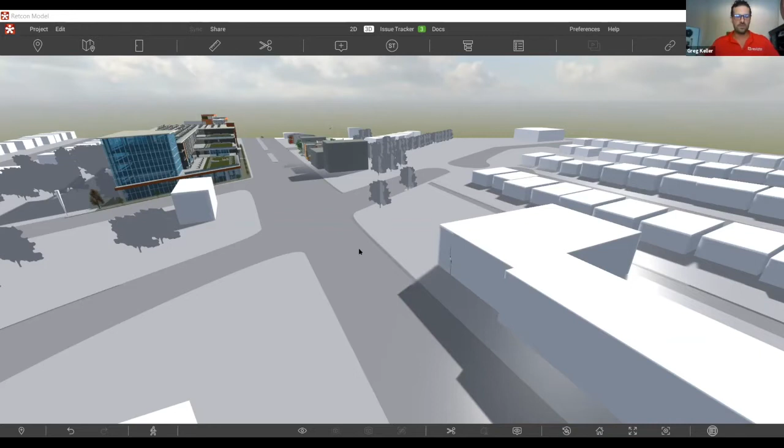So I'm just going to show you guys a quick way to be able to navigate through the model. Keep in mind, this is a massive model where we've brought in all kinds of file types, whether it be Revit models, Civil 3D models, SketchUp models, point cloud data.

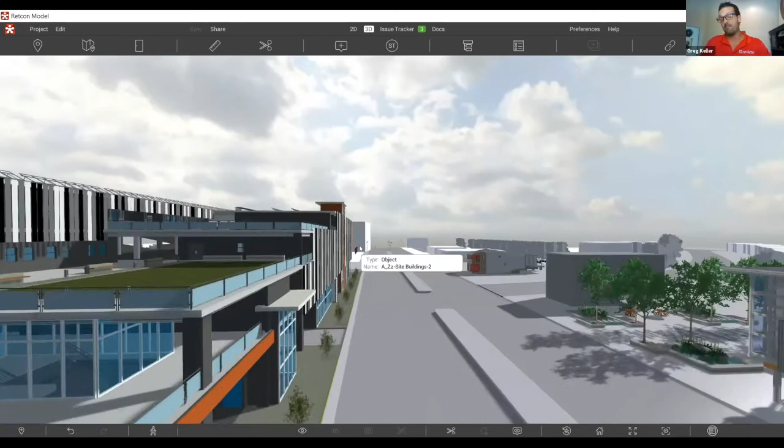So you can see that I'm able to, and it may not come as clear to you guys being over the Zoom meeting, but again, this is a massive model that I can really fly around with ease.

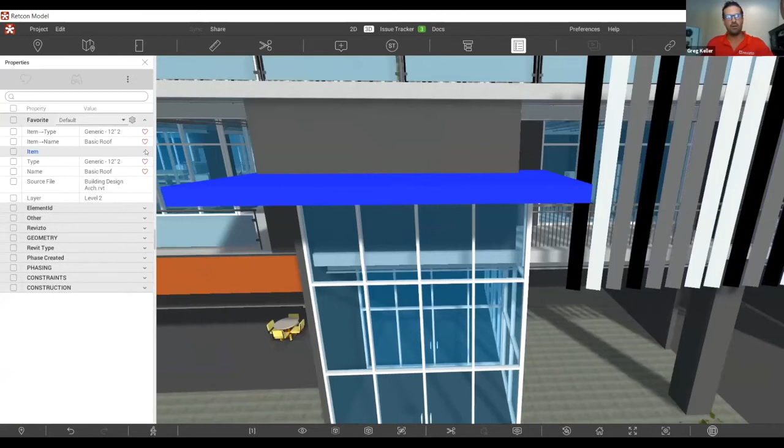And everything in this model, the intelligent data comes through with that. So every single item or object that I double click on, I can get access to all of that intelligent metadata. So again, it's very quick and lightweight to be able to jump around this model.

However, we want to emphasize that you don't want to feel intimidated that you've got this massive model and how do I get around and where do I go. So some of the things that we've got in place here are tools that allow you to jump around that model without having to physically go through that entire model, especially if you're talking about a campus like this or a 50-story high-rise, that can take a while.

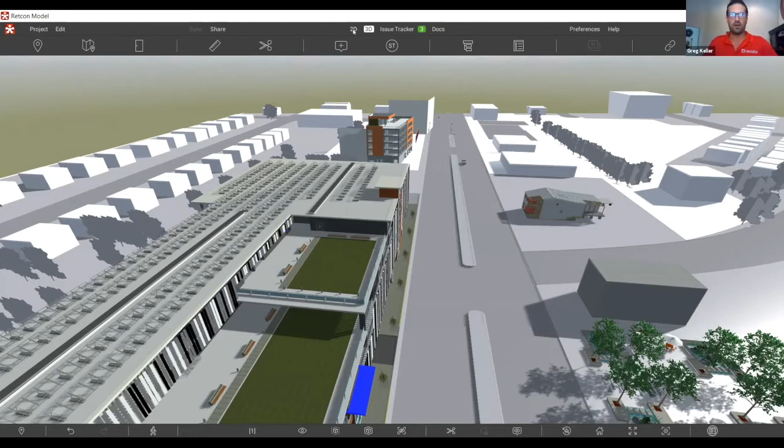So one of the things that I'd like to jump right into is leveraging the 2D sheets that you guys are probably all accustomed to, and using that as a way to get comfortable and transition into being able to better view that 3D model. So here I am in our 2D section of Revizto.

This is where all of your drawings and other associated 2D documents come from and are housed. So if I open up this sheet here, this is our second floor space plan, which I'm sure for all of you is probably what you're used to looking at.

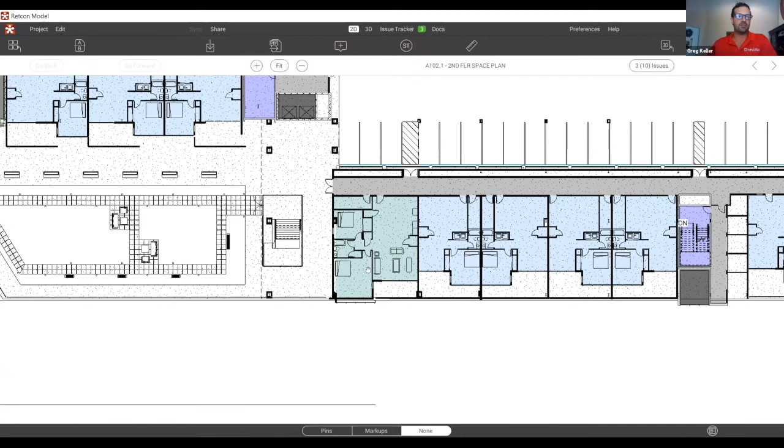Well, one of the things that we are able to do to allow you guys to get from point A to point B in really the click of a button, and use this 2D that you're comfortable with as that way to transition into 3D, is our navigate to 3D button.

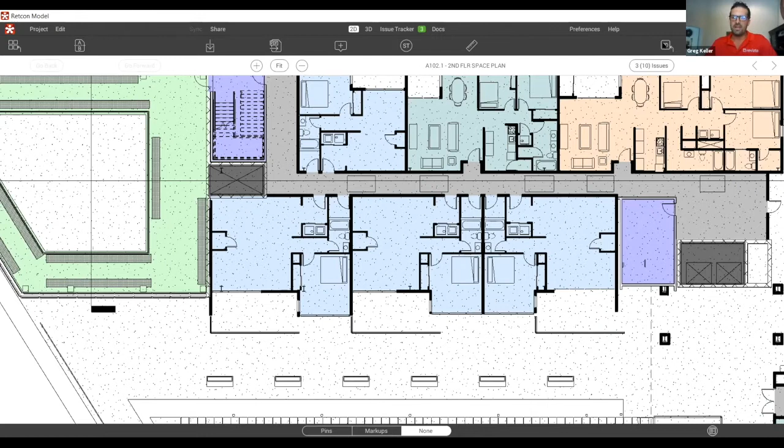So if I'm in this space and I want to be able to hop into this office, I can simply click this 3D button up here, and that allows me to just single click wherever I want to go, and instantly it takes me to that room in the 3D model.

So again, when I talked earlier about the power of that 2D and 3D model synergy, here's a perfect example of that. Whereas you guys are undoubtedly used to looking at a dumb PDF that doesn't have the intelligence with it, now the 2D in Revizto carries with it all that intelligence, including the XYZ coordinate.

That's what allows us to use those drawings as a way to get to that spot in the 3D model. And once I'm in there, you can see how I can use the right button on my mouse to simply look around, click on objects, gain access to that metadata, and take measurements.

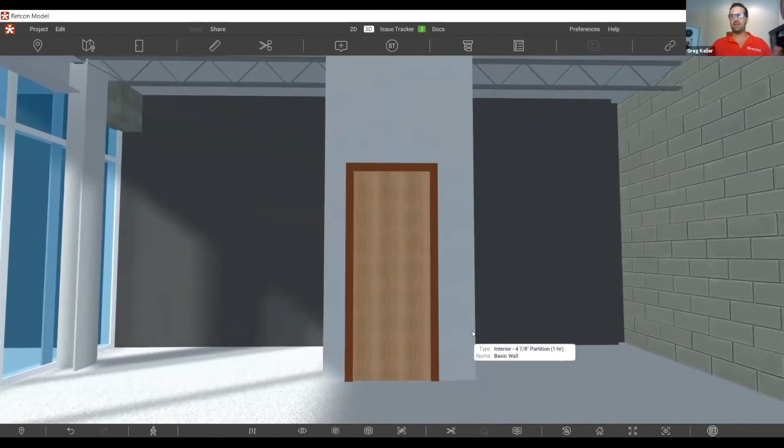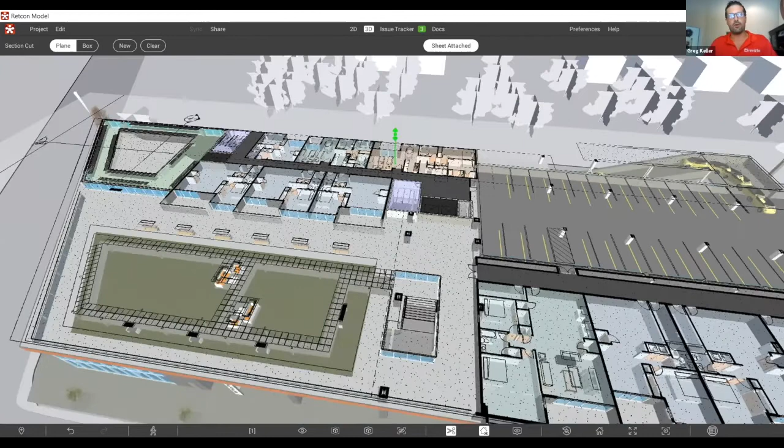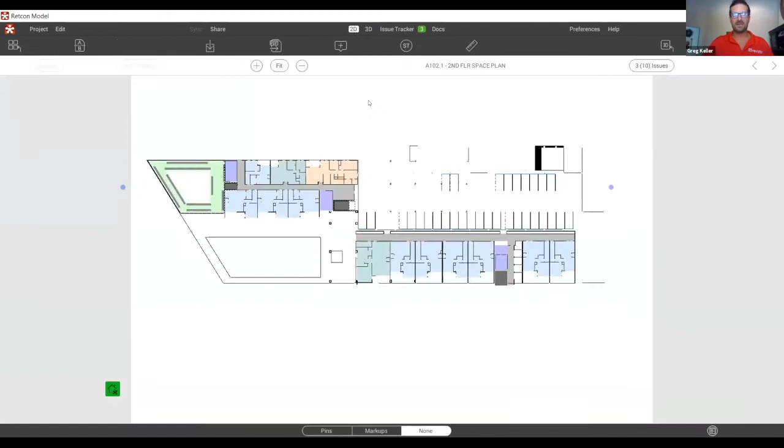One other thing I want to focus on with 2D that truly bridges that gap and brings to light the 2D-3D model synergy is this intelligent overlay. There's no better way to illustrate that we can intelligently tie your 2D drawings and 3D models together with this 2D overlay. This is probably the most utilized feature when people are trying to make that transition and gain insight into going from leveraging 2D information into the intelligent 3D model. When you talk about the easiest way to gain that intelligence and make that transition, this 2D overlay is certainly one of the main features.

Keep in mind, this isn't anything that you or your downstream project stakeholders have to spend a ton of time setting up. This all comes with the intelligent export from a Revit model.

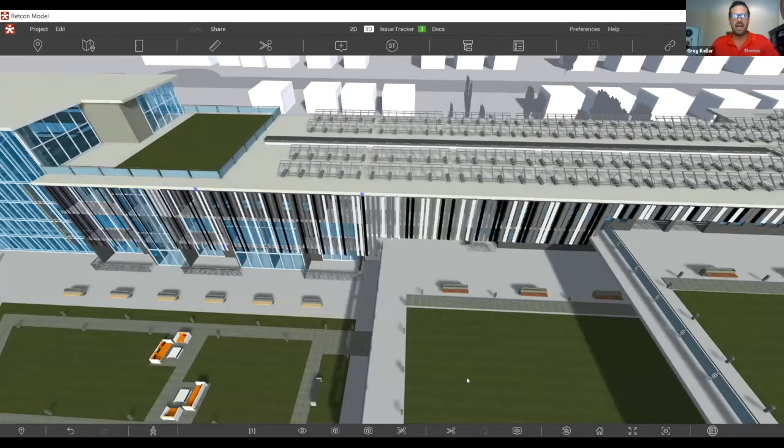So jumping back, now that we've illustrated the way to go from 2D to 3D, I'm going to focus back into our 3D model and show you a couple other ways to get around the model, talk about issue creation, and how you're able to see and provide that design intent or gain access to those issues as you move about the project.

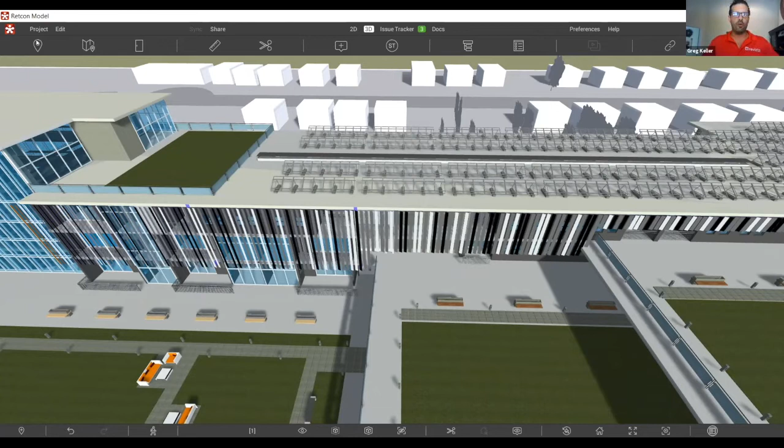So a couple other quick things: viewpoints. These can be pre-set up, brought in from Revit or Navisworks, with a whole folder structure of viewpoints that allows us to jump from point to point.

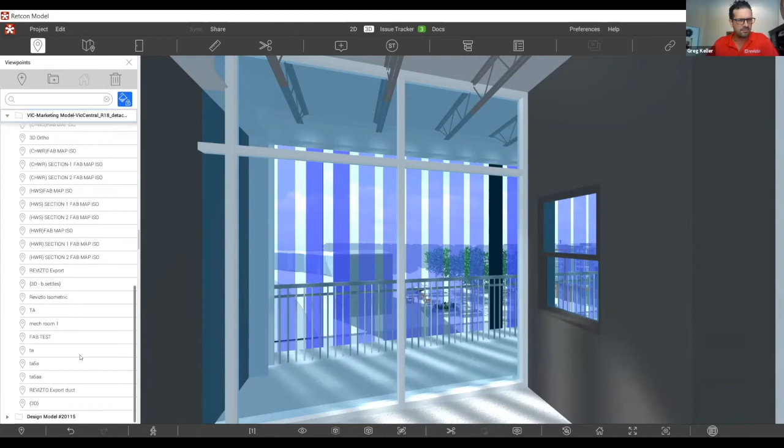There's also the ability to leverage point clouds. So if I go into... let's see, I forgot what it's called. It's at the very top, Greg, in the top folder. Oh, Retcon views. Thanks, Brett.

So I click on this 3D plumbing view, and you can see how it instantly takes me from one spot in the model to this intelligent view. We wanted to use this view to show you the power of Revizto and all the file types you're able to bring into one environment.

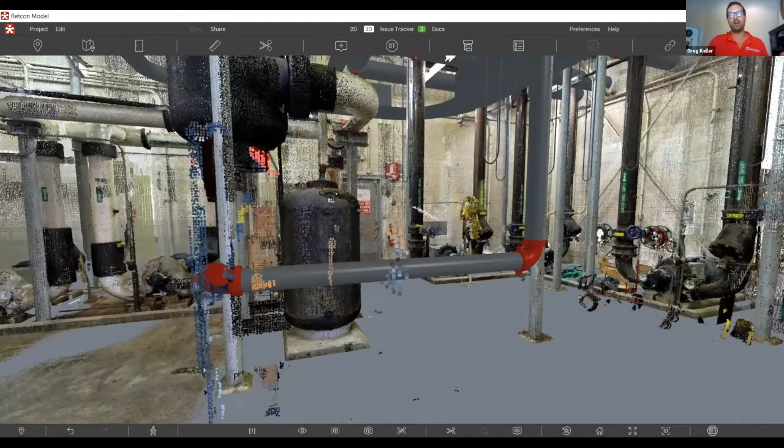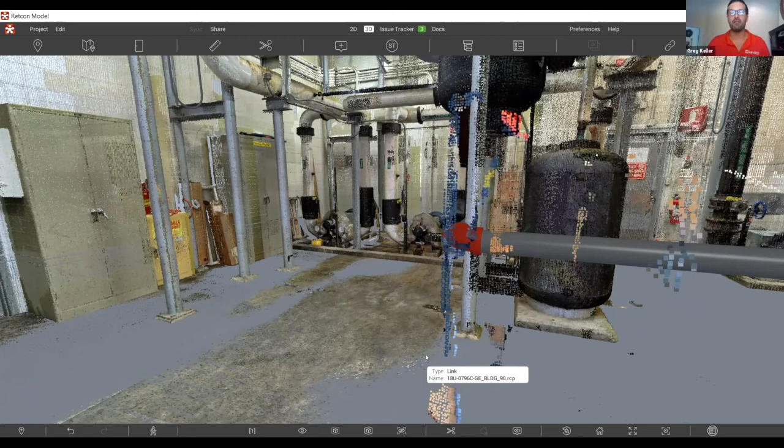So we went from working through an intelligent Revit or Navisworks model here in Revizto to a point cloud. Especially when you're talking about retrofits and seeing how your new building design fits on top of or within an existing structure, or if you just want a point cloud reality capture to monitor progress of ongoing construction, you have the ability to do that in Revizto.

It's super lightweight and easy to use and fly through. So you have a massive mechanical room here that I'm able to fly through with ease, and you can see how lightweight it is.

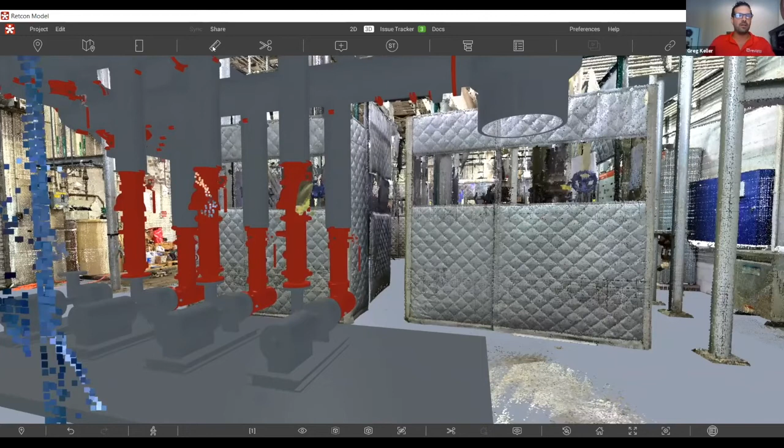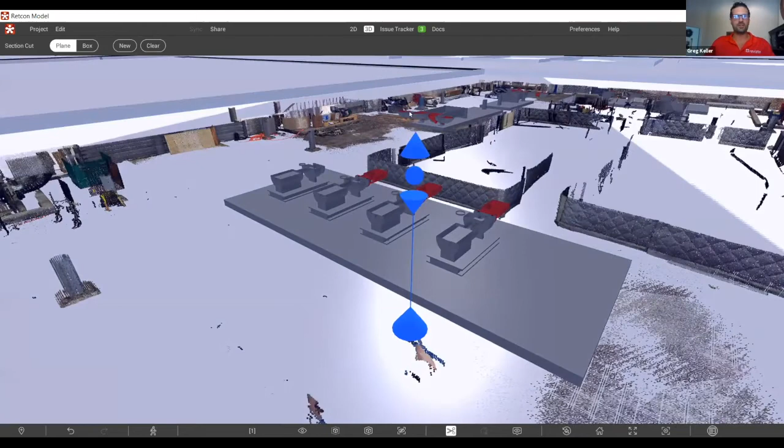Additionally, now that we're in here, you have things like being able to section cut. Let me undo that - I don't know what happened there. There we go. So being able to quickly cut a section plane inside of that intelligent model or point cloud space.

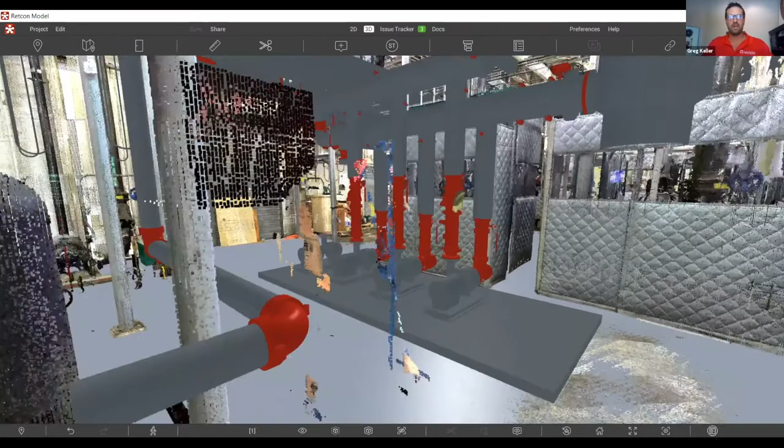Being able to come in and take measurements - let me click out of this. Whether it's a point cloud file, an Inventor file, a Revit file, or a Navisworks file, we can come in and do measurements. Sorry, I clicked on the wrong thing again. Let me uncheck the screen grab so I can grab our measurement tool.

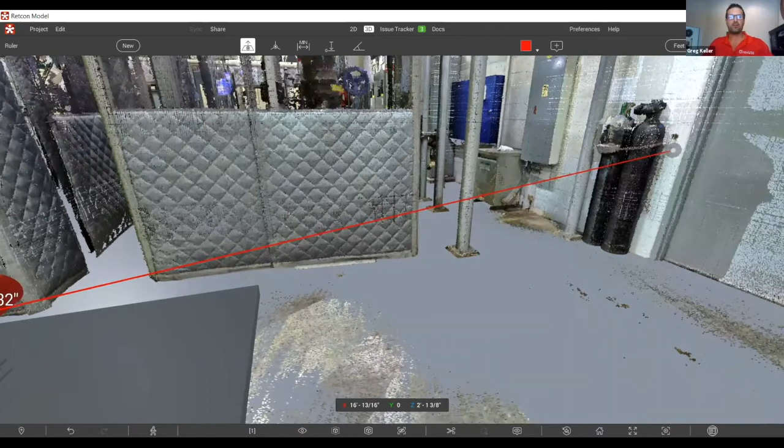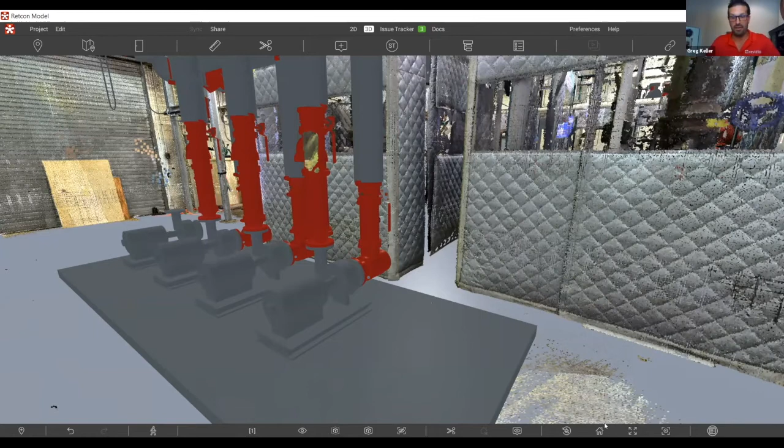We have a few different ways to measure inside of Revizto. One is a laser ruler, where it'll automatically grab two sides of two surfaces that it recognizes. I can also do point-to-point measurements, minimal distance measurements, spot elevations, and slope elevations. All these tools can be done in Revizto with ease, and it's democratized in a way where the learning curve is virtually nothing - you don't have to be a power user technically in Revit or Navisworks to do that in Revizto.

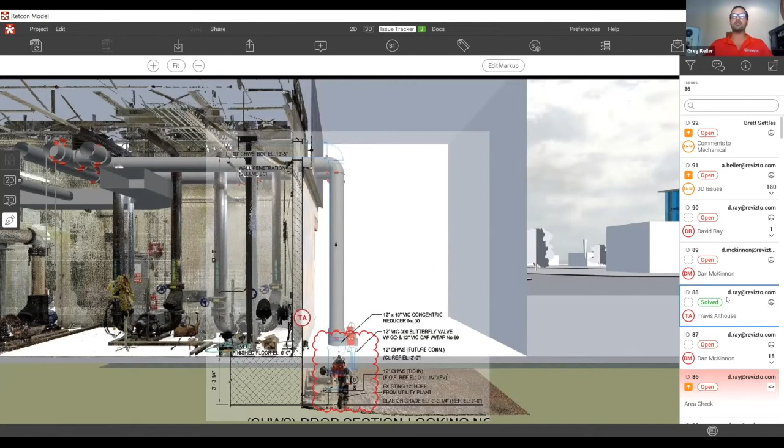With the minute or so I have left before I turn it over to Brett, I want to talk briefly about our issue tracker. When you talk about that siloed communication method - emails back and forth, screenshots, PDFs - what are your project stakeholders delivering to keep you in the loop about where things stand, what issues are being worked through, and what avenues do you have to communicate what you want to your downstream stakeholders? This is a single, embedded issue tracker that allows us to have everything in one place.

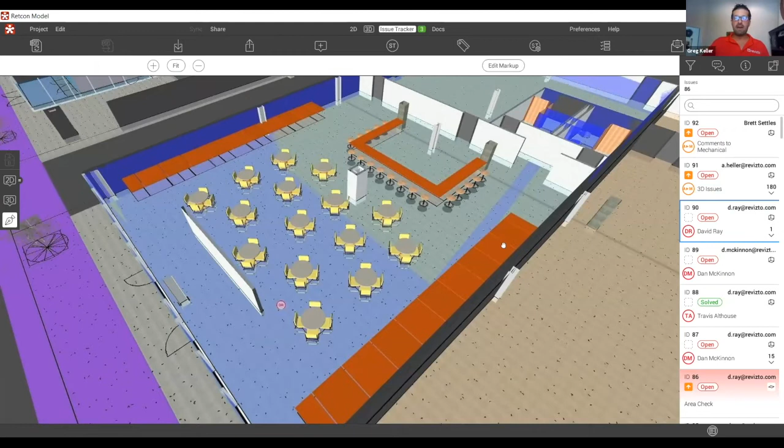It removes those data silos and brings it all into this intelligent issue tracker that ties it automatically to those 2D documents and 3D models in one fell swoop. So in this example, we had a sheet overlay with an intelligent section cut of the 3D model. This is our markup view, but if I click here, it brings me to that live view of the 3D model in that section cut.

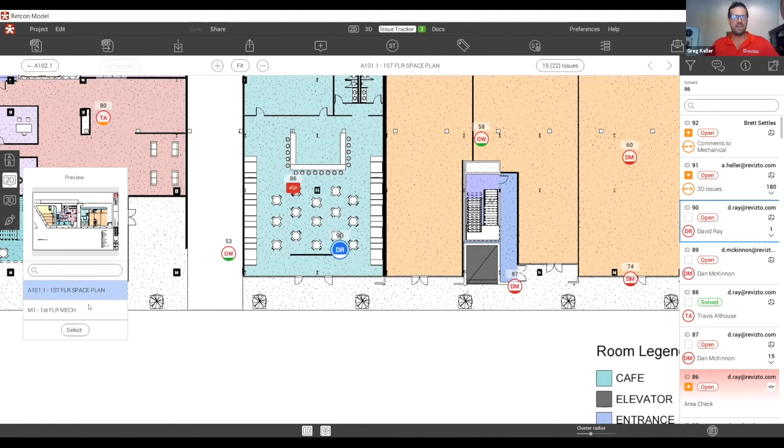It also allows me to see where that issue resides on any 2D drawing that shares that XYZ coordinate. So you can click on this 2D section here, not just this first floor space plan, but also first floor mechanical, because it has that same XYZ coordinate. This gives you the ability to see these issues in 2D or 3D, or create these issues.

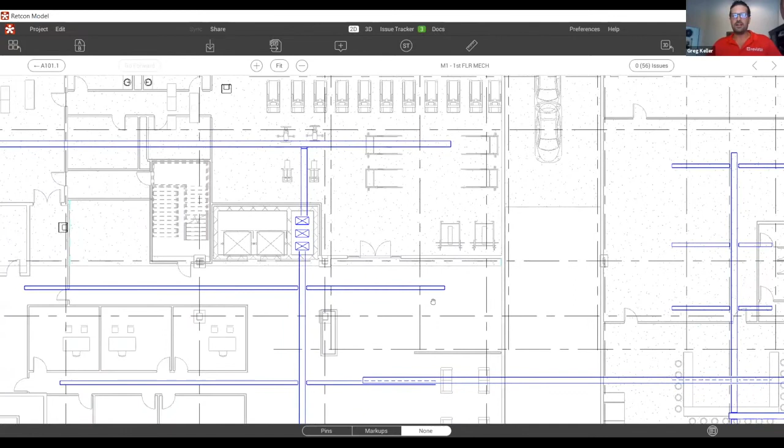So if you're in this drawing and want to communicate to your architects that you want 2 doors here, what I can do is come in with our stamp functionality, find a pre-formatted stamp, which are intelligent one-click issue creation, and drop a stamp here. I'll take this comments to architecture stamp and drop it right on the location of this door.

Now what I can do is just say, I would like 2 doors here. And now you've instantly made that communication directly to your prime design architect, and they can instantly see that issue, not just here in Revizto, but also natively back into Revit.

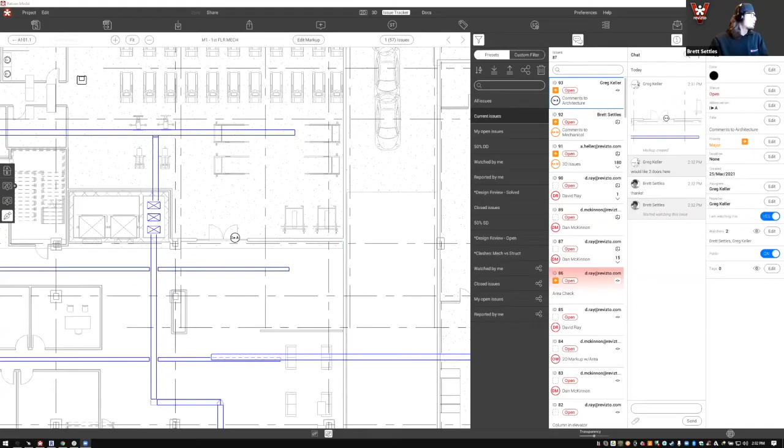Thank you, Greg. Yeah, absolutely. I'm going to run through a few slides myself before we dive into the project. So we'll get this open and get in present mode.

And what we have found is when we put this in place with a lot of our owners, they found it very enlightening to be able to be part of the development of their building, understand that they always have insight into each and every phase.

So at the beginning phases of the project, we would have been talking about occupational requirements, right? What do the maintenance crews need to be able to do their job? How can they access the critical systems of the building? In hospital projects, we would say, do the OR nurses have access to everything they need by doing that in an immersive environment? And all sorts of occupational parts that allow that design to really fit the needs of what you're building and the people that are going to occupy the real estate that you're developing.

And then, of course, after we figure out the design intent of your building, we jump into the coordination part of it. This is the really technical part of the process between the people who are building your buildings, your general contractors, your subcontractors, and the people that design the buildings. What's really important is there can be critical changes that happen in this process that are technically correct, but are not what you want as the person or the group that is actually doing this building. And we have found that with your insight, we were able to deliver a better product because you were constantly in tune with the deliverables that we were producing.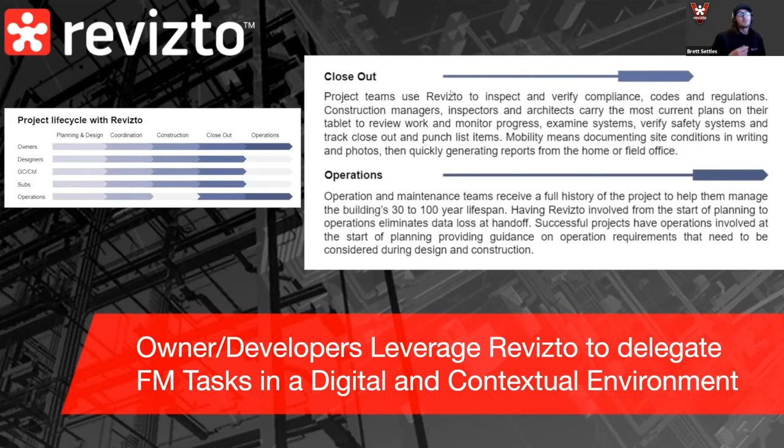I think that's a really important aspect, because while we're not a true facilities management system, one of the things we do really well is distribute and track tasks that have to happen in a building. The FM system says this room needs to be painted - how are we going to track that it gets accomplished? Who are we going to assign that to? And if they find any problems with repainting that room, how do they communicate that back to you?

So Revizto is really operating as a communication tool that sits on top of your FM database, allowing you to use that intelligent information to give your crews more contextual information about the building they're maintaining.

One thing I want to point out is that while everyone in this room may not understand how their buildings get built, I definitely do. There are massive variations in the type of data used to actually produce your buildings before they get built. What Revizto does is allow your designers, contractors, and fabricators to bring all that data together so you can see it in an easy-to-use format, and so you can use that data after your contractors and designers are gone and you're on your own. I think that's a really important aspect as well.

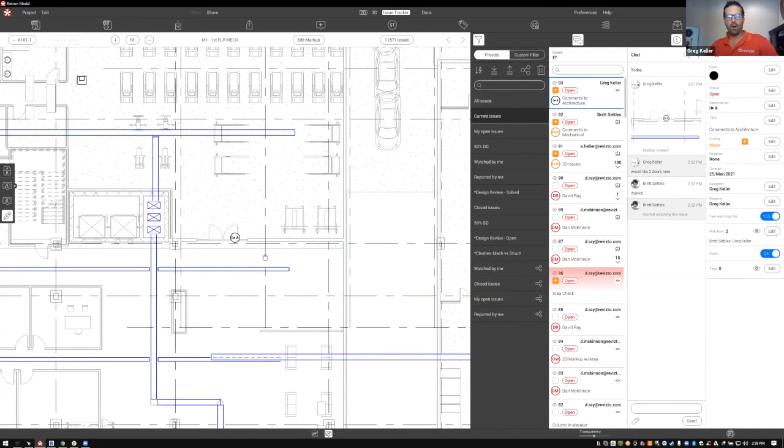One final point, Brett - you guys as real estate developers are the ones who get to control and mandate what you want as a final deliverable. In the case of Related Companies, University of the West of England, and the Smithsonian, they were mandating: we want a Revizto model as our deliverable. So this gives you everything you need in one spot that you can then have for closeout and facilities management along the way.

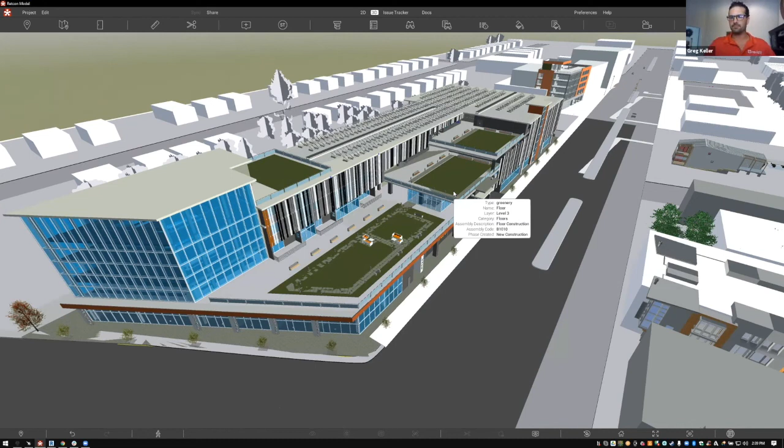Yes, a couple final things that go above and beyond what Greg said - if you have technology professionals working in your real estate company or not, all of this intelligent data is available. To give a real quick example, since we're coming up on time, everything is an asset. You own all of this - everything from this chair to that staircase has to be managed by the real estate company.

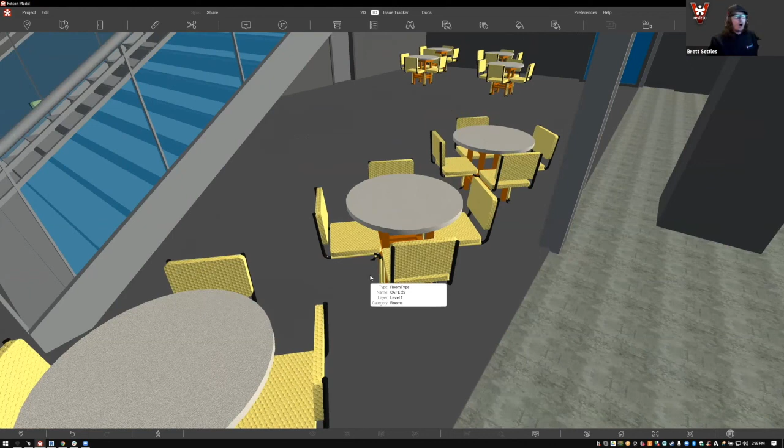Retrieving information about these objects, as I dive in here, is very easy. You start talking to your interior designer: this isn't the chair, this isn't the finish we wanted for our cafeteria, and I want you to change that. That's something you may not have even known until you've seen the chair sitting there when you walked into your building for the first time.

Now imagine scaling that among everything inside your building, from statues to existing rooms that may have been added on, or any asset you have, like Wi-Fi routers. Having all that information is critical to get into the FM system, and is also critical in communicating to your maintenance crews and occupants what exactly this information is.